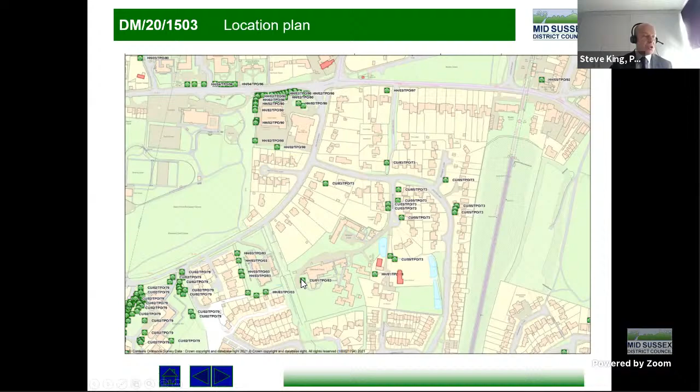So this is the application site. As I say, it's accessed from the roundabout at the bottom of Amberley Close, and then you've got the access road into the site. So this is Oakwood Court itself at the northern end of the site, and then you've got the blocks of the Oakwood Court flats, with a fall in levels from north down to south. At the moment, this area is a landscaped garden area in the grounds of the site. Car parking is located to the north of the building and to the west here.

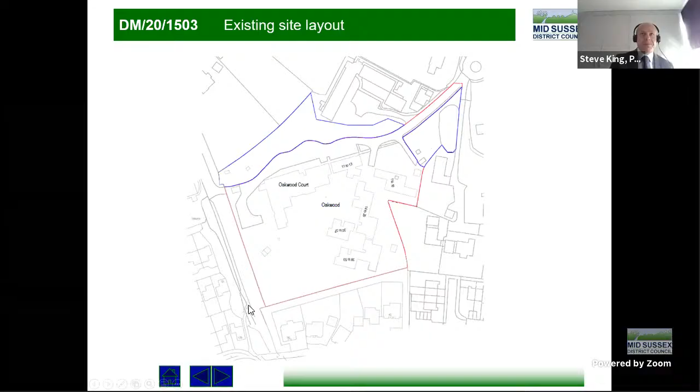So just in a bit more detail, this is the application site as it is at the moment. So this is the area here of partial demolition, and this is where the proposed extension would be located.

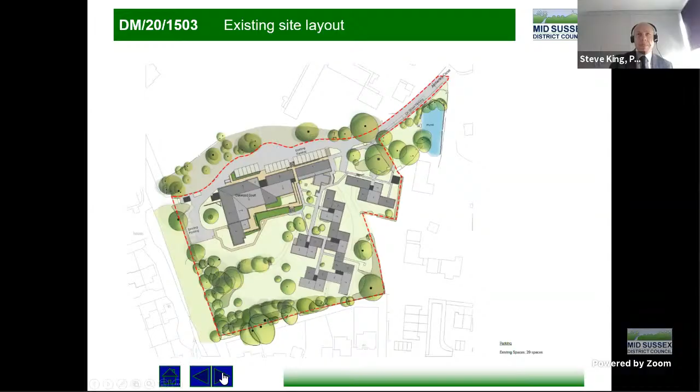So this slide shows the existing site layout.

So the application, as I say, proposes an extension on the southern side, proposing an additional 31 bedrooms.

So with the associated changes in the building itself, that would result in a total of 60 bedrooms on the site, going up from the current total of 33 beds.

So this is the footprint of the proposed addition on the southern side of the site. The details of that are set out on page 26 of the committee report.

And internally, as we'll see, the proposal includes a laundry, a new plant room, a lounge and dining area, a hairdressing salon, and other staff facilities.

So the extension measures around 41 metres in length, 17.5 metres in width, and it uses the change in levels.

So it's partially over three storeys, with a lower ground floor, upper ground floor, and a first floor.

Externally, the elevations would be brick with a tiled roof, and you'd have an external amenity area located in this area.

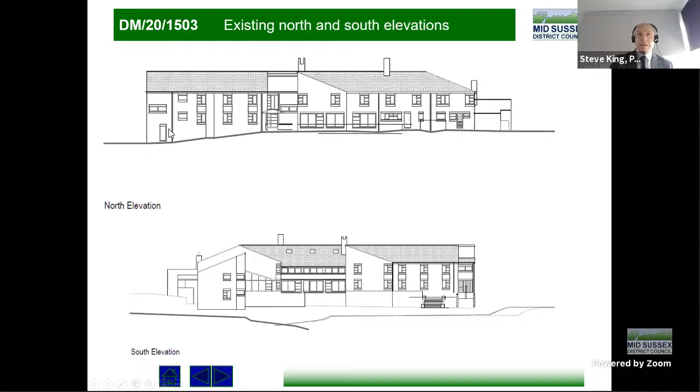And what's proposed is the extension on the southern end. So these are the proposed north and south elevations. So if you're at the bottom of the site looking upwards, this is the southern end of the extension.

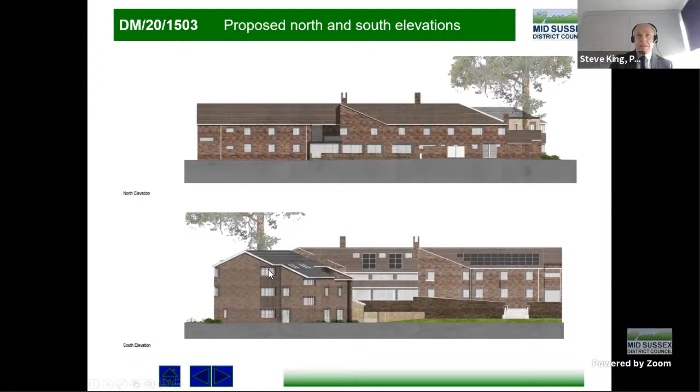So you can see at that point, because of taking advantage of the levels, it's got three floors at that end.

Proposed east and west elevations. So again, this is the proposed extension. Again, you can see it taking advantage of the change in levels through the site.

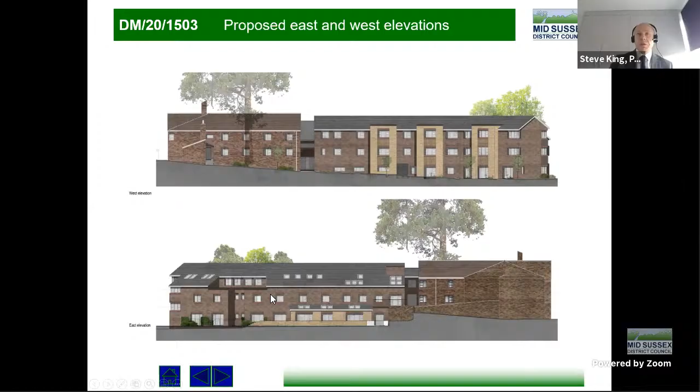And that's the other side looking back towards the flats within the site. So that's the east elevation at the bottom.

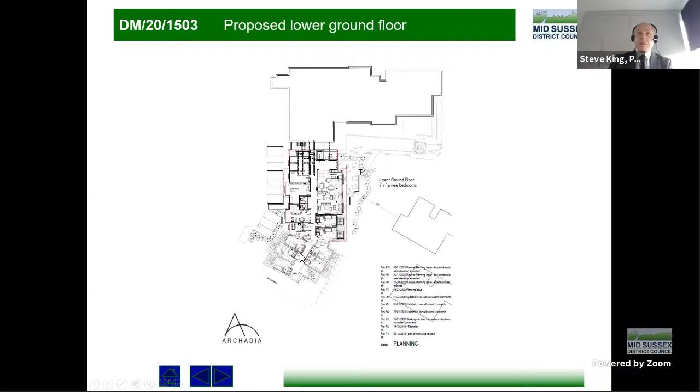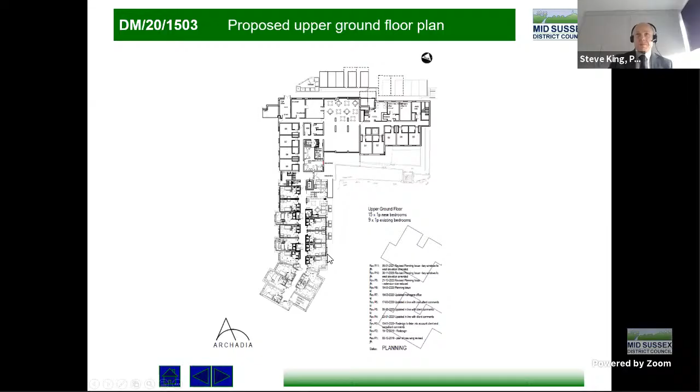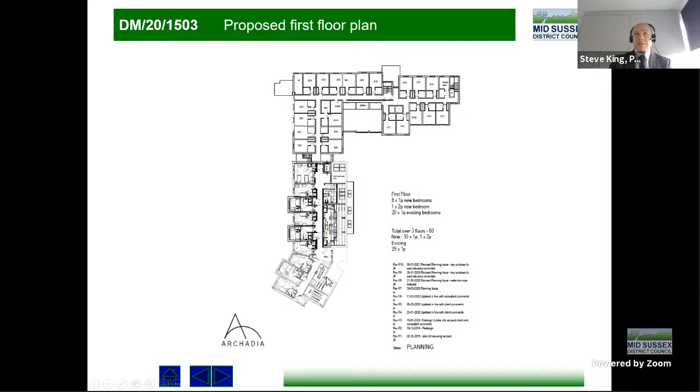And then at the first floor plan, bedrooms on the western side, and these are staff facilities on this side, facing the flats.

This slide shows sections through the site to illustrate the potential impact on light from the proposed extension on the existing flats to the east.

So you can see this is a 25-degree line through the site. You can see that the extension has been designed in a manner so that it wouldn't impact on light levels.

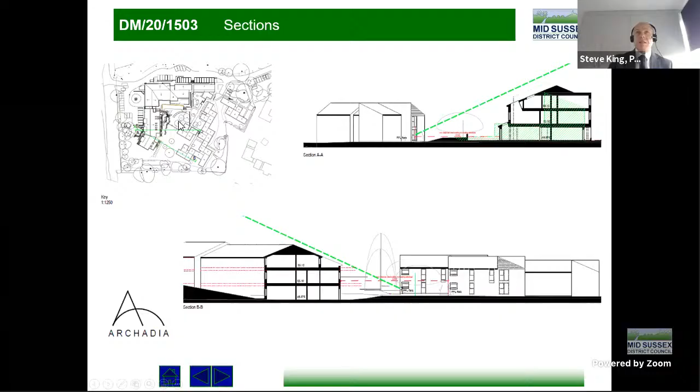That are received by the existing flats across to the east. So that's what that section is showing.

This is a tree retention plan. I've put a note at the top just so you're aware, this is showing the footprint of the building as it was originally proposed.

You'll see from the committee report that during the course of the application, the footprint of the building has been reduced in size. So this plan, in terms of the footprint of the extension, still shows the originally proposed scheme rather than what's before the committee today.

But it is useful to show the trees that would be removed, because they're still the same.

And it's these trees, highlighted here in this area, that would be removed. That's detailed in the committee report.

Some 3D images that I hope are helpful in explaining the scheme in a bit more detail. So this is the existing building here. This is the wing that would be demolished and then replaced.

So this is the extension shown here. These are the existing flats to the east of the site. That's just another view, so that's the flats to the east, and this is the proposed extension here.

This is within the site, viewing the proposed extension, and this is in effect looking down from the west. So again, this is the extension, and those are the proposed flats, the existing flats within the site.

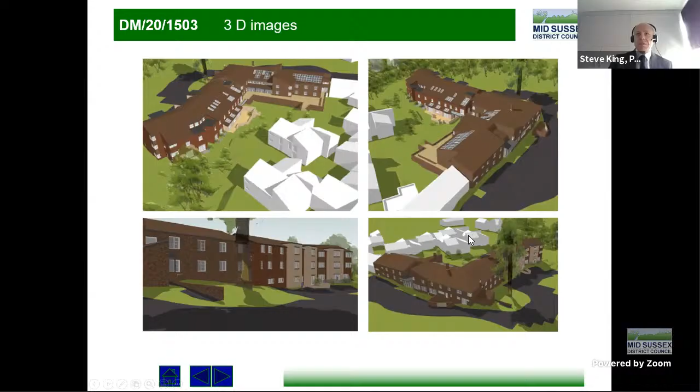So what I've got here is a series of photographs that show the site. These are taken from within the existing landscaped area of the site, looking up.

So this is where part of the existing building would be demolished. This is from the existing garden landscaped areas looking across. Again, it's this little section that would be demolished, and then the extension coming across here.

This is at the back of the site, or the western side. So this is the preserved tree, the only preserved tree on the site, which is unaffected. So that's the car parking area at the back.

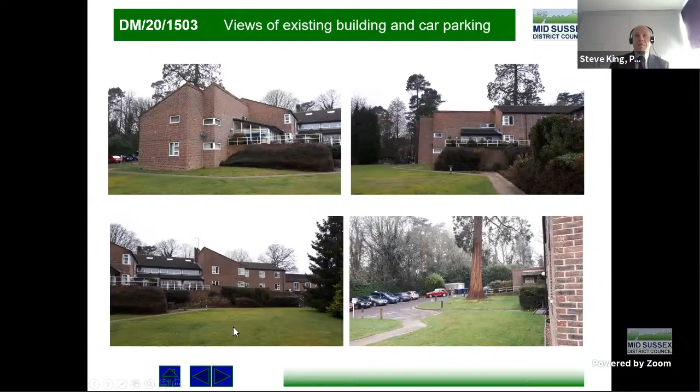This is within the landscaped area, again looking back up at the existing main part of the building, the care home. It's a more panoramic view, hence it's got a slight fisheye distortion on it.

But that's taken from within the landscaped area looking up at the whole of the existing site, and that's the neighbouring flats to the east.

Various views of the neighbouring flats to the east. This one is taken from the existing terrace, looking across to the east, looking from the site down to the existing landscaped area, and you can see the flats across to the east.

That's another view of the flats to the east, and this is taken right from the western side of the site. This is the area where the proposed extension would be, where the cursor is.

Just some views taken of the existing landscape garden, from the southern end, looking back up to the site. These are the trees and vegetation that would be removed in the existing landscaped area for the proposed development.

Views of the existing access. This is within the site, the private road within the site. This area here is marked as visitor spaces, which is also used for car parking.

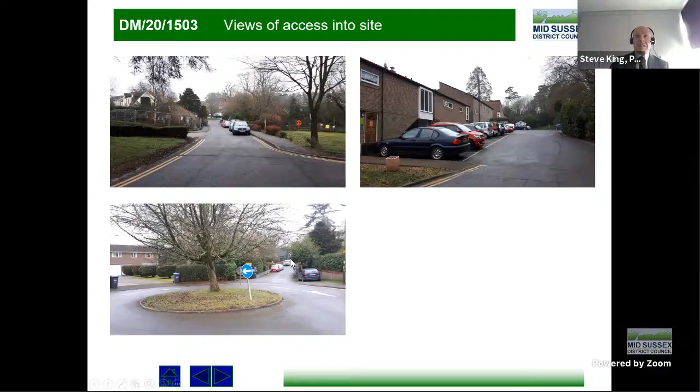These are some views along Amberley Close, and you'll see double yellow lines at the top end near the junction, and then it's single yellow lines down the bottom. I think parking's restricted for an hour in the morning and an hour in the afternoon.

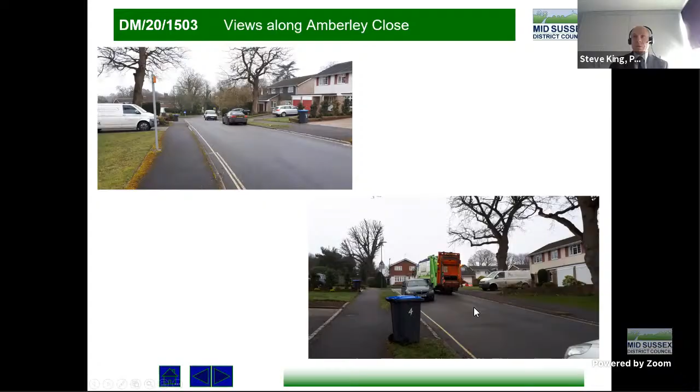I took these photos last Thursday on bin collection day, so you can see that even with a car parked there, the refuse lorry had no trouble getting past and accessing the site.

So if I just go back to the layout plan, the issues are as set out in the report, so I won't go through them in huge detail, but I think it's useful to highlight the main things.

The principle of the development is dealt with on page 30 of the committee report. The proposal is in the built-up area of Haywards Heath, where policy DP6 applies in the district plan, and officers consider the principle of development is acceptable.

Design is dealt with on page 30 of the report. The design has been amended quite significantly during the course of the application, increasing the proportion of open space around the building and reducing the footprint of what's proposed. The design has been arrived at to take advantage of the levels in the site and make good use of that. You'll see that the council's urban designer is satisfied with the proposal, and his comments are on page 31 within the committee report.

In terms of the impact on the listed buildings of Great Haywards and Great Haywards Barn, they're both Grade 2 listed. That's dealt with on page 32 of the report. But because of the buildings that are in between the existing flats, we don't think there's any impact at all on their setting.

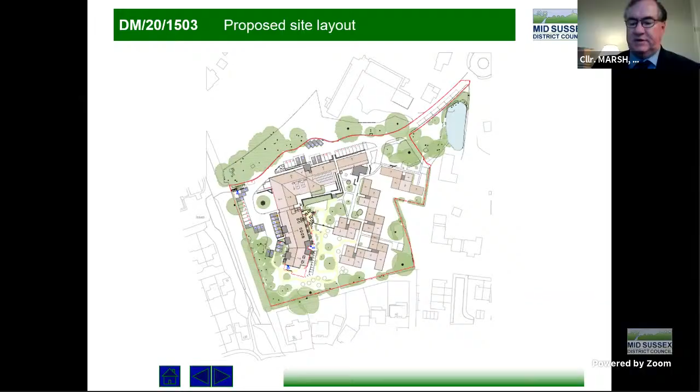Just thank you, screen. Mr. King. Yep, thank you. Councillor Sweatman.

Thank you, Chairman. I think Mr. King's just answered some of my questions.

I was very concerned for the residents at Fernycroft, and I consider the building is fairly overbearing. With the leaves off the trees in the winter and the low winter sun, that could actually reduce their light levels. But I agree, it doesn't seem to agree with some of the policies in DP26. But as we all know, an application is not decided on one particular policy, it's the development plan as a whole.

So although I sympathise with the residents, I really do, but I don't see where we got anywhere to go with this one other than to approve it.

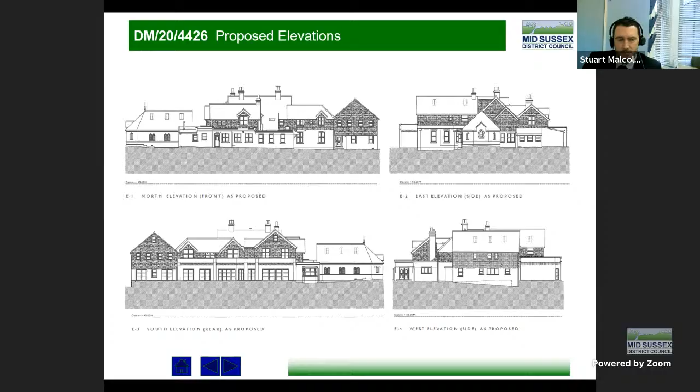So the proposal will provide a good standard of amenity for future residents, both in terms of meeting the minimum space standards, as well as the provision of external amenity space. That's because 8 of the units have private outdoor space, and all 10 units will have access to the outdoor communal area at the rear of the property.

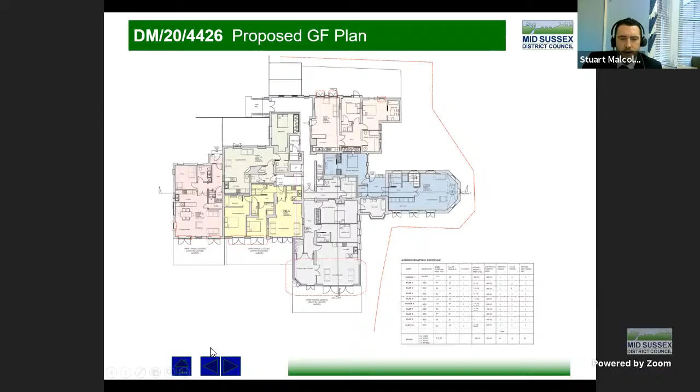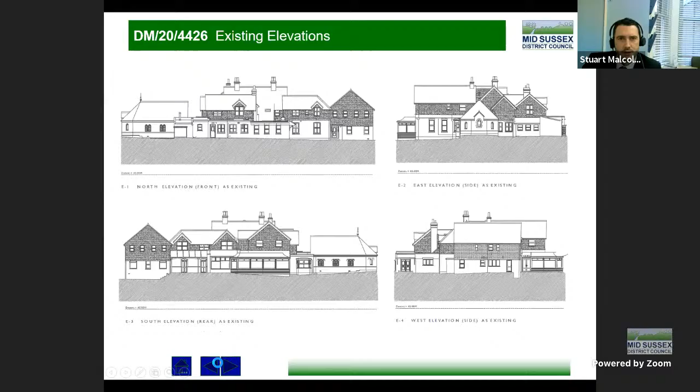So to summarise, I'll just bring it back to the site plan, as is normally done in these situations. The conclusion is that planning officers consider this a good quality scheme that meets the policy requirements of the development plan. On those main issues from the report that I've not specifically mentioned yet, the scheme is considered acceptable in principle. It will only have a minor impact on the South Downs National Park.

Significant harm to neighbouring residential amenity cannot be demonstrated, and conditions will secure further details where necessary on matters such as ecology and sustainability. So overall, there are not considered to be any sustainable grounds to reject the development, and the application is therefore recommended for approval.

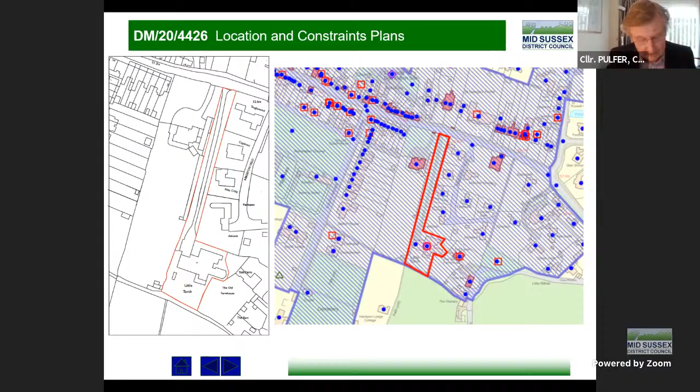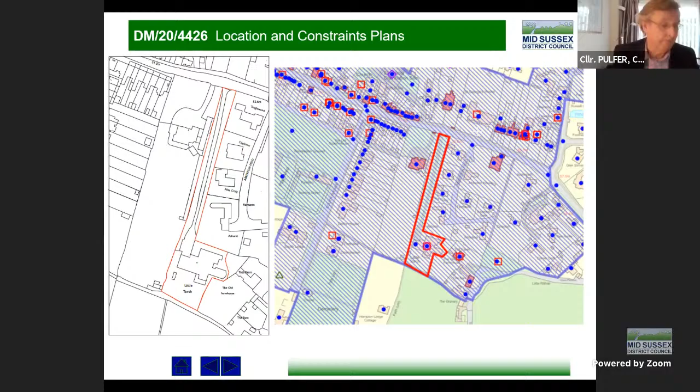I was going to move as recommended, Chairman. Thank you, does anybody wish to second that? Councillor Phillips, you've got your hand up marginally before Councillor DeBell.

So we've got a recommendation. It is recommended that subject to completion of a satisfactory Section 106 planning obligation securing the necessary financial contributions towards infrastructure set out in the assessment section below, planning permission should be granted subject to conditions in Appendix A. And there's a contrary recommendation B: if all the necessary forms and obligations aren't signed by the 11th of June this year, it will be refused.

Jen, could you call out everybody's names, please? Yes, so for, against or abstain: Councillor Allen. For. Councillor Cartwright. For. Councillor Coote.

For. Councillor DeBell. For. Councillor McNaughton. For. Chairman. For. Councillor Phillips. For. Councillor Pulfer. For. And Councillor Sweatman. For. And that's unanimous and carried.

Thank you, Jen. And we now move to the north of the district. Hang on a second, let me get my brief sheet. We have no recommendations for refusal, so we go to item 8, which is other matters.

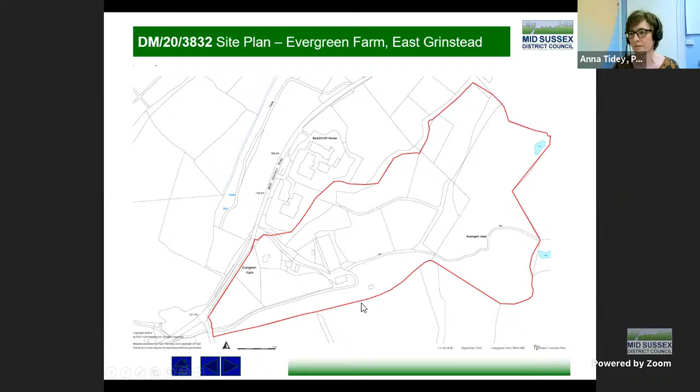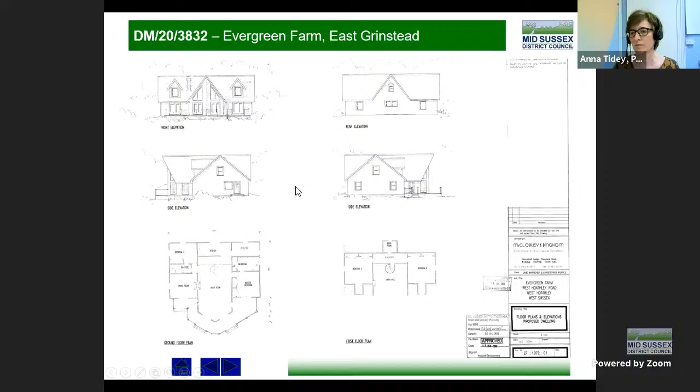So this is the position, and this is the existing property here. This is just for information, really. This slide explains and shows the dwelling that has been permitted under the 2011 approval, and an associated range of garages.

These photographs indicate the access to the existing property, behind these stables here - you see the stables and then the existing timber building. Just to illustrate the lie of the land, there's a substantial dip in the land. It runs away steeply to the north of the pasture area, and also includes this woodland area in the distance on the eastern side of the site.